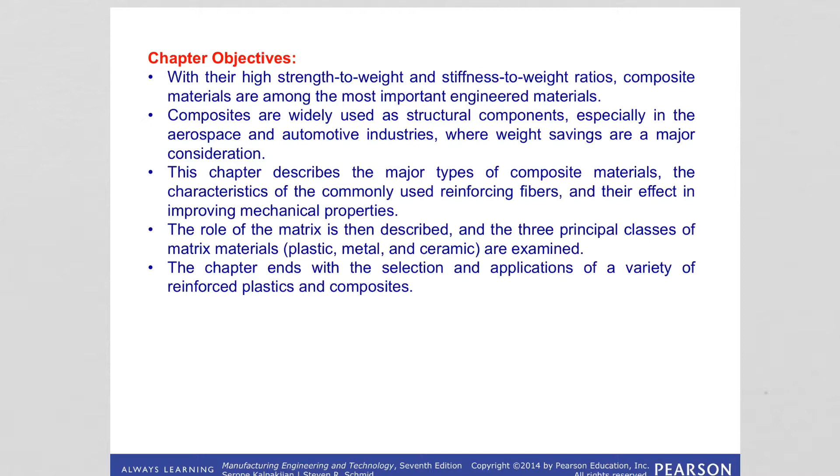So what is actually a composite? It is a combination of two or more distinct and insoluble phases with a recognizable interface. These different parts of the material can be easily determined because they are distinct, chemically different, and there is an obvious interface between the two regions.

The reason why we mix two or more materials is that this way we can obtain properties that are superior to those of the individual components acting independently. So what can be these combinations, how can we combine different types of materials?

We can combine reinforcing fibers with polymer matrix, metal matrix, ceramic matrix, and based on that we divide composites into 3 different types.

Composites are found in applications in aircraft, space vehicles, satellites, offshore structures, piping, electronics, automobiles, boats, and especially sporting goods like tennis rackets, baseball bats, etc.

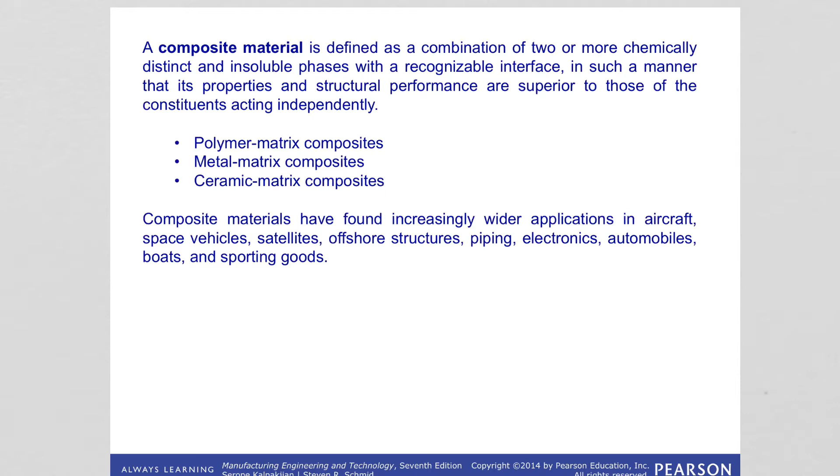Today's aircrafts, in this example we see the Boeing Dreamliner, are 50% composite by weight. Of course, composite cannot be used everywhere because in some areas we need electrical and thermal conductivity, so we use metal alloys like aluminum alloys, but most of it is composite, and this provides lightweight and high strength to weight ratio.

Basically we see carbon laminates and sandwich composites. When we are mixing two or more different materials, we can mix them in a variety of different shapes, so each constituent can have a different shape to optimize the performance.

We also see fiberglass. So as you can see, composite is used in aircrafts.

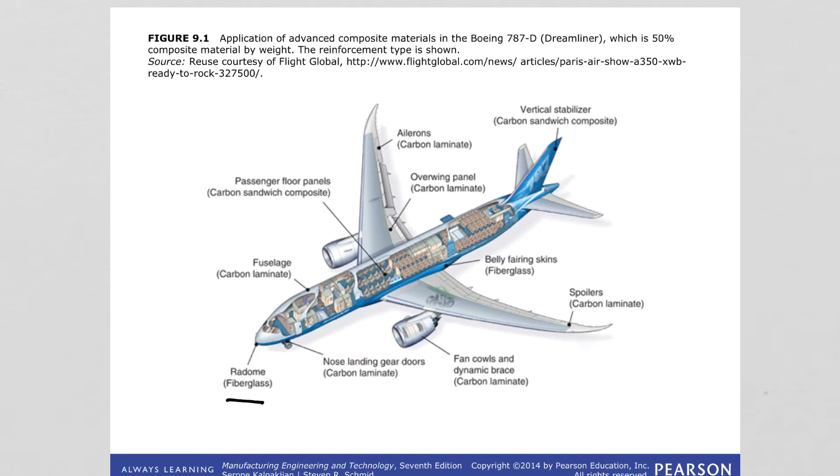So first let's look at reinforced plastics. This is the most commonly used composite, so it is important to cover this topic. We call these reinforced plastics or polymer matrix composites or fiber reinforced plastics.

Basically what we have is a matrix, a continuous phase, and we put fibers in it. These are the reinforcing phase fibers, and this is matrix, and these are fibers. So fibers are discontinuous, dispersed.

It is very important to be able to homogeneously distribute the fibers or other types of reinforcing elements. This way we get a homogeneous distribution of properties, and the polymer can be epoxy or any other type of polymer.

Okay, so we're gonna see those. We know polymers provide lightweight properties, but they are not strong. So by putting in the fibers, we obtain a material that is lightweight, and fibers provide the strength and stiffness. Mixing these two materials gives us high specific strength and high specific stiffness. This also increases the fatigue resistance, toughness, and creep resistance compared to just non-reinforced plastics.

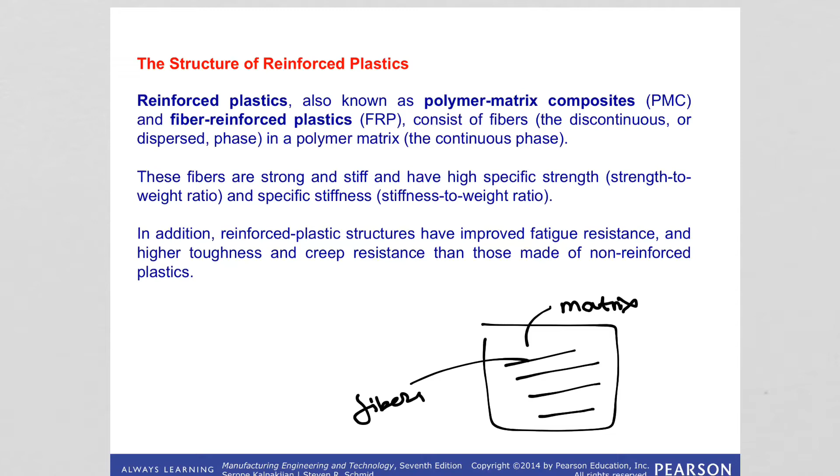So the reinforcing material is usually in the form of fibers, but it doesn't have to be. It can be particles, short fibers, long fibers, flakes. As you can see in these images, we have particles in a composite.

Of course, they are not showing the particles, why I don't understand. But think about it, particles are there, homogeneously distributed in a polymer matrix.

There can be short, chopped fibers, all homogeneously distributed, or there can be long fibers distributed in the structure. These long fibers can also be called continuous fibers, and can be aligned in different angles, like 0 degree, 45 degree, 90 degree, let's say 45 degree.

Depending on how they are aligned in the structure, properties are enhanced only in that direction, not in the transverse direction. These layers can also be put on top of each other, forming laminates, and there are foam structures in between two different materials.

And we can put these in. So as you can see, the configurations of how we mix two different materials are changing.

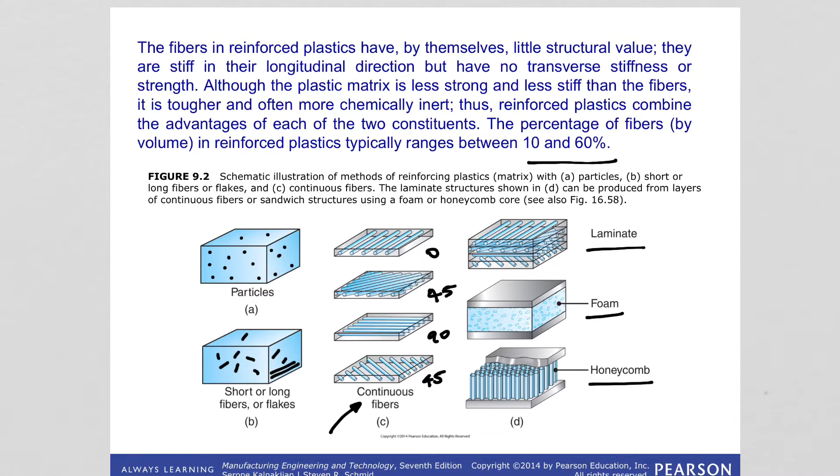So if we look at the reinforcing fibers, what type of fibers are used to reinforce plastics? We can see that glass fibers, carbon fibers, boron fibers, aramids known by its trade name Kevlar, and there are also other fibers important like nylon, silicon carbide, silicon nitride.

As you can see, all these materials we learn can be shaped in the form of fibers and used as reinforcing materials. What about the matrix?

Matrix can be thermosets, thermoplastics, metals and ceramics. For thermosets, this is epoxy and polyester, and thermoplastics there are different types that can be used, and metals like aluminum. The fibers can be aluminum oxide, silicon carbide, and the matrix like magnesium, aluminum, titanium. Ceramics can be silicon carbide, silicon nitride, etc.

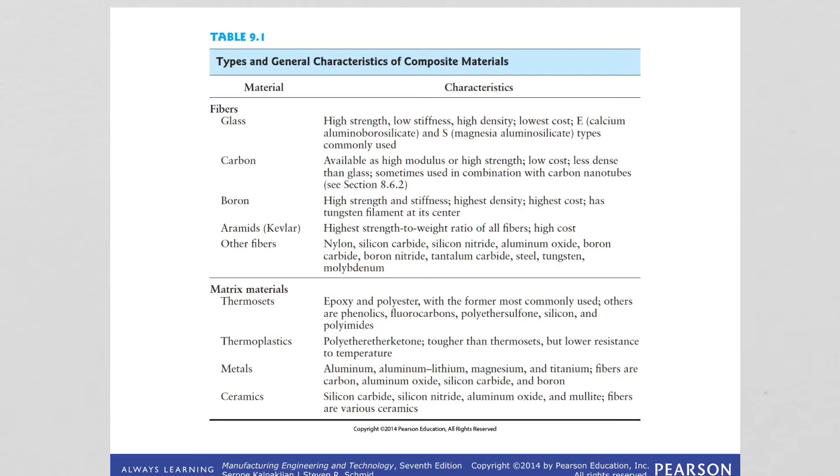In this figure we are seeing specific tensile strength and specific tensile modulus, basically strength over density and modulus over density ratios for various fibers used to reinforce plastics. Some of them are listed with their trade names, and we might not be able to obtain their composition, but we know Kevlar, and you see how high its strength to density ratio is, and different types of reinforcing glasses, graphite, boron, aluminum fibers, titanium, steel. All this information is listed, and we can compare different types of fibers.

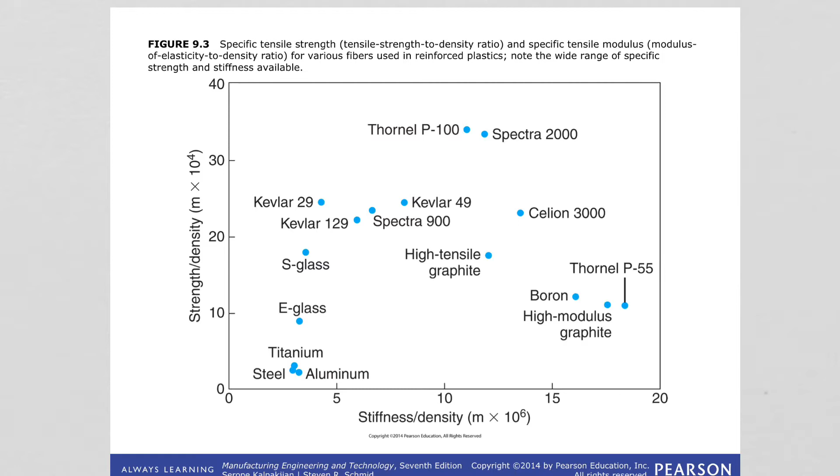So if we look at reinforcing fibers, we have seen glass, carbon, ceramic, aramid or Kevlar, and boron fibers. Now let's look at each of these.

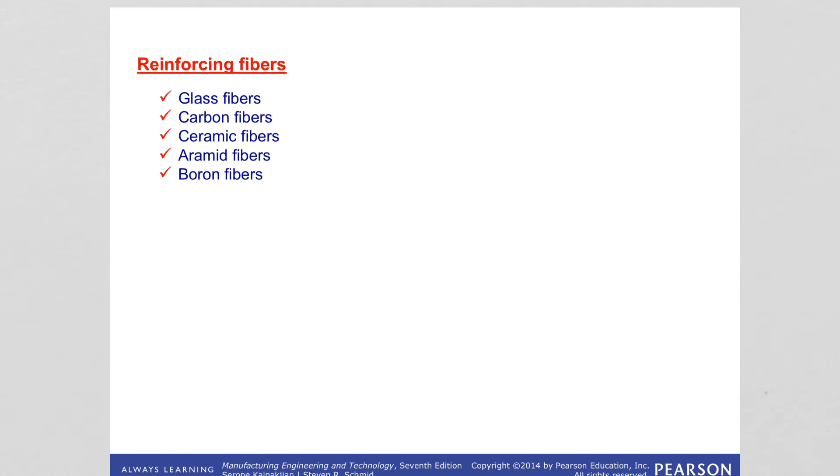Glass fibers are the most widely used ones and the least expensive, that's why it is very commonly used. These composites contain a range of 30 to 60% glass fibers, and the rest is basically polymer. How do they make these glass fibers? They make them by drawing molten glass through small openings in a die. If you watch the video, you will see.

The fibers need to be treated with certain chemicals called silane, which is a silicon hydride. The reason they treat the fibers with that is because this way they can provide better interaction between the fibers and the matrix, because if fibers and matrix don't interact nicely, the stress transfer from the matrix to the fiber doesn't happen. The interface is very important between the fibers and the matrix, because when we apply stress to the matrix, it has to transfer the stress to the fibers, since fibers are the ones carrying all the stress. We want the fibers to carry the stress, not the matrix. That's the whole idea.

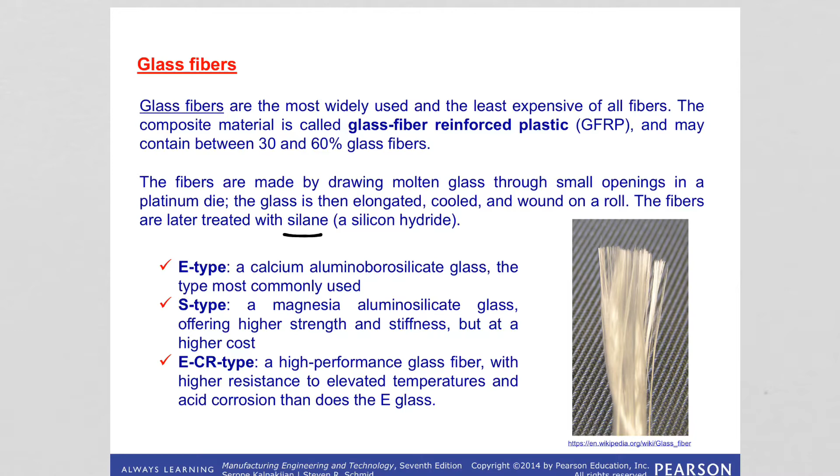So there are different types of glass fibers: E-type, which is a calcium aluminoborosilicate glass; S-type, a magnesia aluminosilicate glass; ECR type, which is a high performance glass fiber with higher resistance to elevated temperatures and acid corrosion than E-glass. Depending on the application, you can choose one of these different glass fibers. Basically what changes is the composition.

Carbon fibers are more expensive than glass fibers, but they provide great properties like low density, high strength, high stiffness. So how do we make carbon fibers?

First you need a carbon source, which comes from organic molecules like polyacrylonitrile, PAN. The PAN fibers are exposed to high temperatures in an oxygen-free environment, and all non-carbon atoms are expelled from the structure. Once this is achieved, the fibers are woven into a fabric or combined with other materials that can be molded into desired shapes and sizes. There are also graphite fibers which are conductive and make it possible to enhance the electrical and thermal conductivity of the matrix, the plastic.

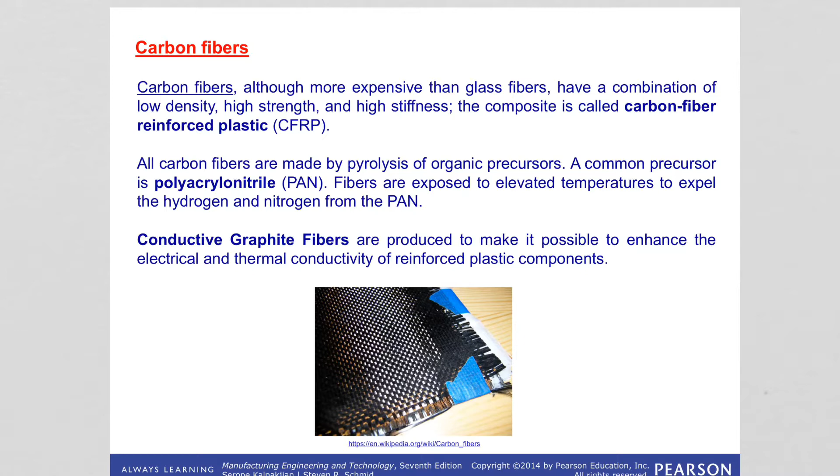That can be used in electromagnetic radio frequency shielding, lightning strike protection. So this one also has different areas.

Ceramic fibers: of course, ceramics can be suitable for high temperature applications, and ceramic fibers are usually put into a metal matrix. We have difficulty processing them, so they can be more like chopped fibers or particles. These fibers have low elongation, which we expect, right? They are not ductile, have low thermal conductivity, good chemical resistance, in addition to being suitable for high temperature applications. There is alumina, silica, boric oxide, and different types of ceramic fibers like silicon carbide are possible.

What about polymer fibers? We can make fibers out of polymers, like nylon, aramid, and different types. The most common one you may have heard of is Kevlar. This is the toughest, because remember how polymers are made: there is strong covalent bond in the chain, but between the chains there are weak forces. But when it comes to Kevlar, those are not weak bonds between the chains, but stronger hydrogen bonds and other covalent bonds, which make them very strong.

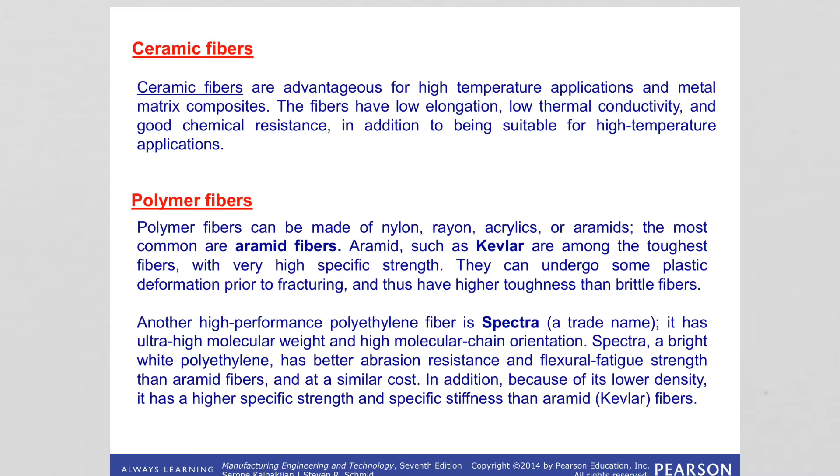Next is boron fibers. These are basically just fibers of tungsten with a layer of boron deposited on top using different techniques. One of them is CVD, chemical vapor deposition. In a certain atmospheric environment at high temperatures, boron is deposited on the surface of the tungsten filament. These provide high strength, stiffness, and resistance to high temperatures, but tungsten is heavy. That's why boron fibers are heavy, and also boron is expensive.

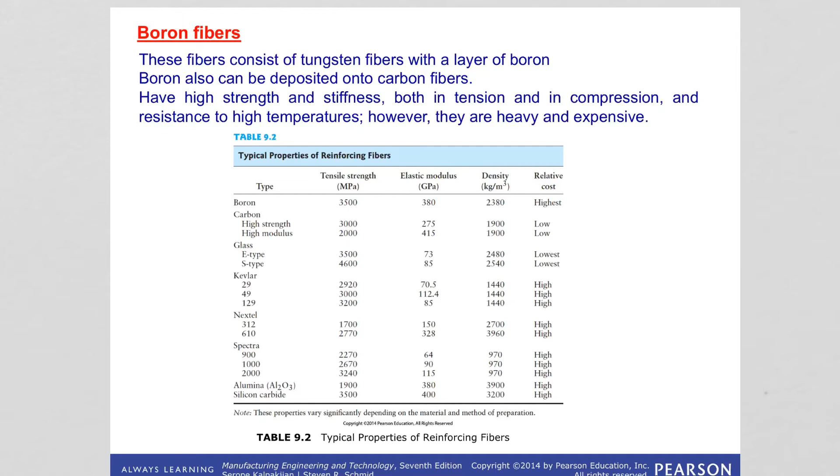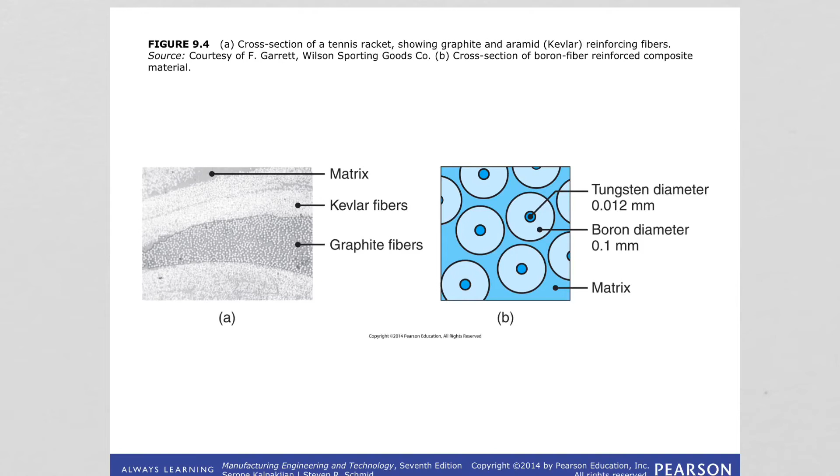This is showing us a cross section of a tennis racket. As I told you guys, in sporting goods, composites are commonly used. When they look under the microscope, you can see the layers, different layers of reinforcing materials and the matrix. You don't have to just put Kevlar in a matrix, you can put two different fibers in a matrix. We are seeing graphite together with Kevlar combined with probably a polymer matrix, providing lightweight and strength together. We also see the structure of boron fiber reinforced composite: we see the matrix, the tungsten core, the fiber, and the deposited boron on top of it.

The fiber size and length is very important in how much enhancement you can get out of that material. So they can be short and long. Short ones are discontinuous, long ones are continuous. So how do we define short fiber and long fiber? If the mechanical properties improve as a result of increasing the fiber length, it is called short fiber. That means as you keep increasing, you keep getting better and better results - that means you have a short fiber. If you keep elongating the fiber and still aren't getting improvement, that means you already have a long fiber. After a certain length, we don't get an increase in improvement as we increase the fiber length - that's what we call the long fiber.

Fibers can be in different configurations and morphologies, like chopped, particles, flakes, a continuous roving like twisted strands, woven fabric, yarn, twisted strands, and mats of various combinations.

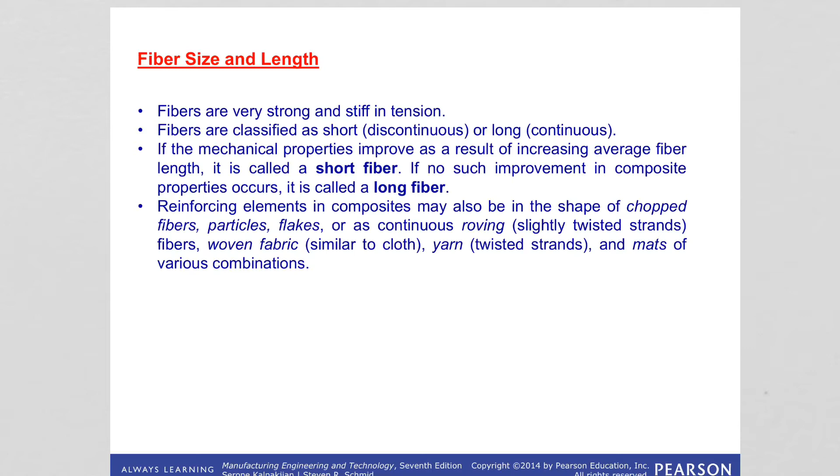What about the matrix? As we said, it can be ceramic, polymer, or metal. What is the role of the matrix? It's basically to hold the fibers in place and make sure to transfer the applied stress to the fibers, so the fibers can carry the load. That is the whole goal. You want the fibers to handle the stresses, not the matrix.

It also protects the fibers against damage and environmentally caused chemical degradation. Because of the ductility and toughness of the plastic matrix, it also provides slow propagation of cracks, preventing sudden failure of the material.

We said a matrix can be thermoplastic or thermoset, and the most common are epoxies, nearly 80% of all reinforced plastics. There are also polyesters, which are less expensive than epoxies. But many other polymers can be used as matrix, depending on the application. Remember, thermosets have better strength values compared to thermoplastics.

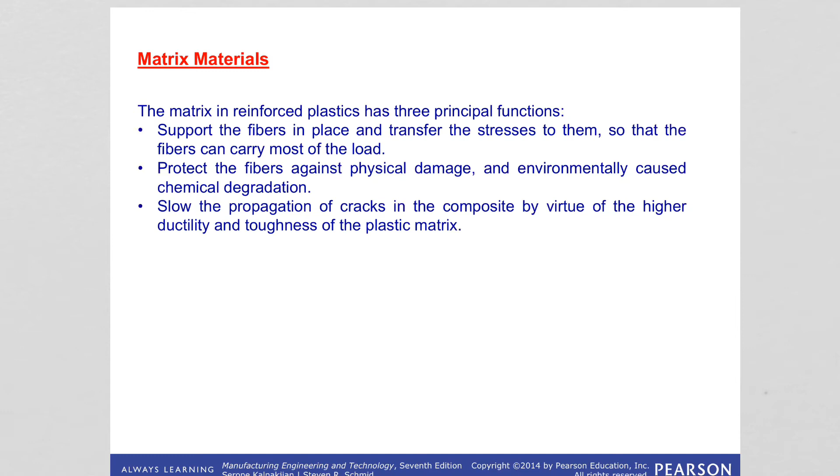Mechanical and physical properties of reinforced polymers depend strongly on what type of fibers you have, the shape and orientation of the reinforcing fibers, their length, and how much of them is inside the material, their volume fraction. All of this determines the behavior and properties of the overall composite.

As I told you, the interaction, the interfacial bond strength between the fiber and the matrix, is very important, because if there is weak bonding, you cannot transfer the stress properly to the fibers, and what happens is fiber pull out or delamination of the composite. So we talked about glass fibers being treated with silane in order to enhance this interfacial bond.

The properties of composites are highly anisotropic, meaning you achieve strength and stiffness enhancement only in a certain direction, the direction the fibers are aligned.

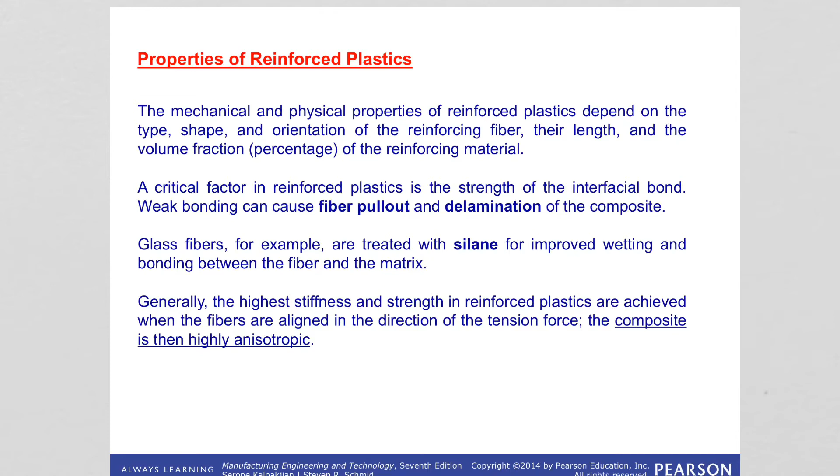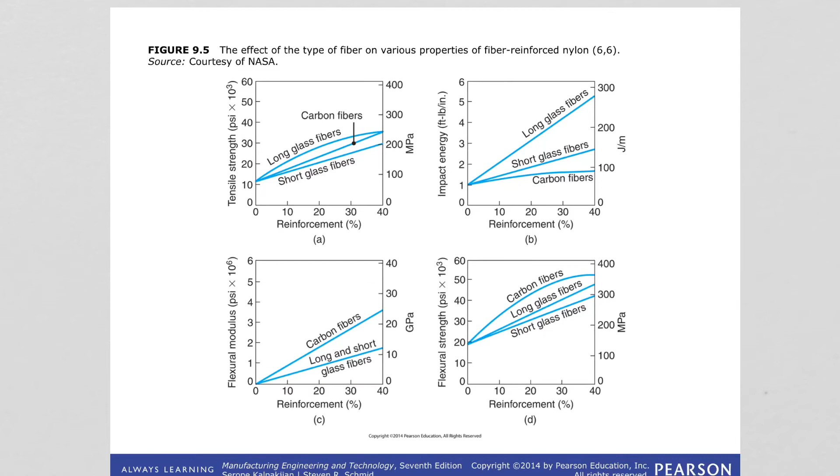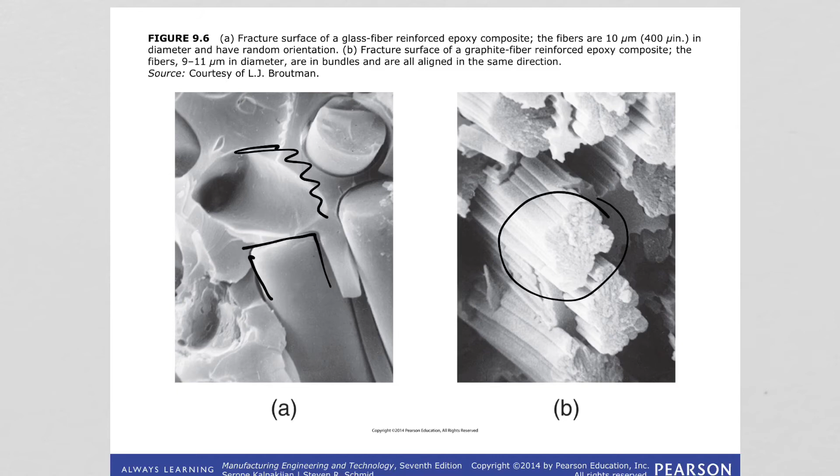We also see the fracture surface of graphite fiber reinforced epoxy composite. In this case, the fibers are in bundles, not individually dispersed. These bundles are all aligned in the same direction in the structure, and they are between 9 to 11 micrometers in diameter.

As I told you, the property enhancements are achieved in the direction of alignment of the fibers. All types of properties—creep resistance, thermal and electrical conductivity, thermal expansion—are anisotropic, not just tensile strength. In the transverse direction, though, we don't obtain the same enhancement.

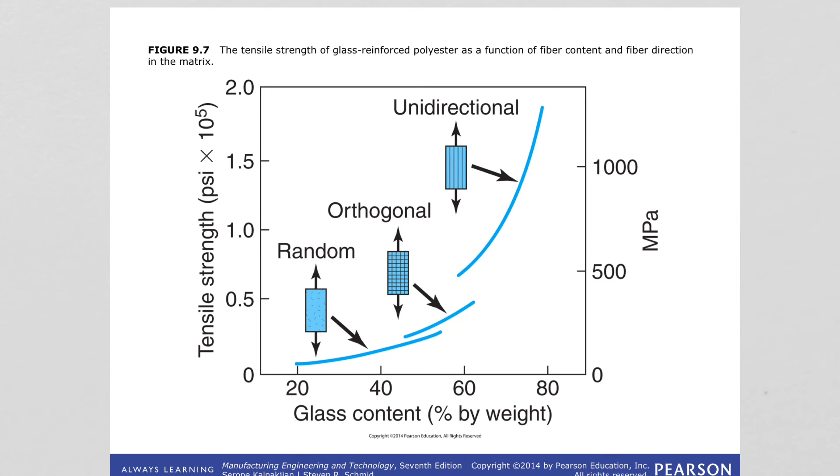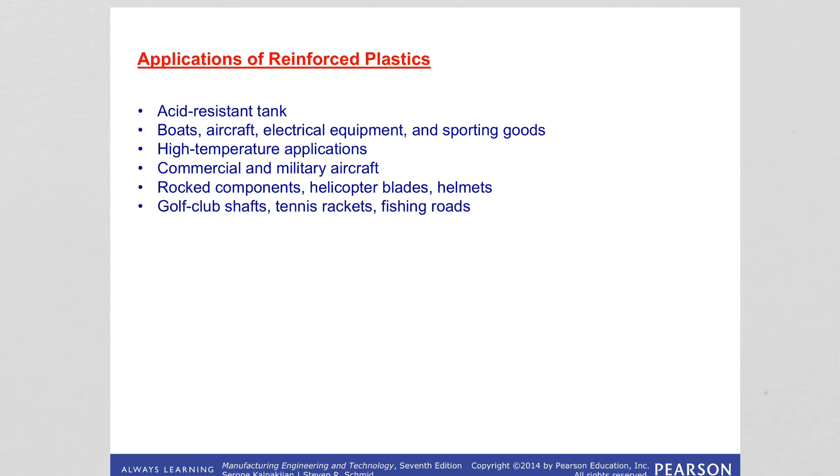So what are the application areas of reinforced plastics? A wide range: acid resistant tanks, boats, aircraft, electrical equipment, sporting goods, high temperature applications, commercial and military aircraft and rocket components, helicopter blades, helmets, golf club shafts, tennis rackets, fishing rods. Just some of the examples—there is a wide range of application areas for composites.

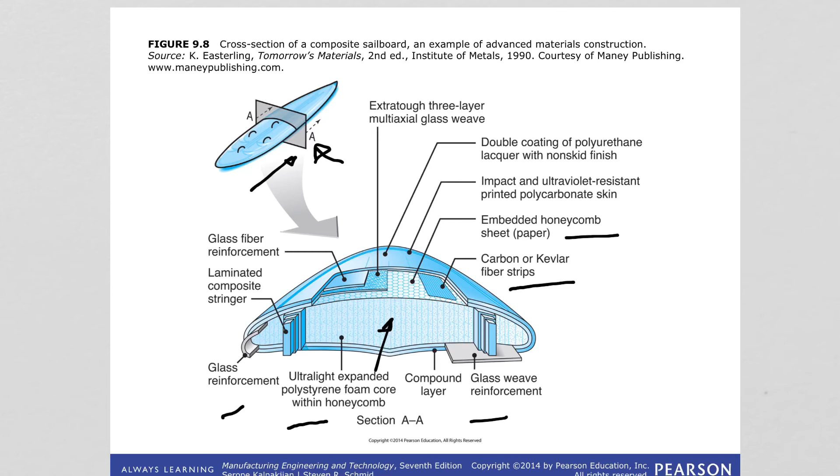Kevlar is used in body armor. Inside the body armor there are Kevlar fibers that are woven, sandwiched with plastic films that provide excellent protection.

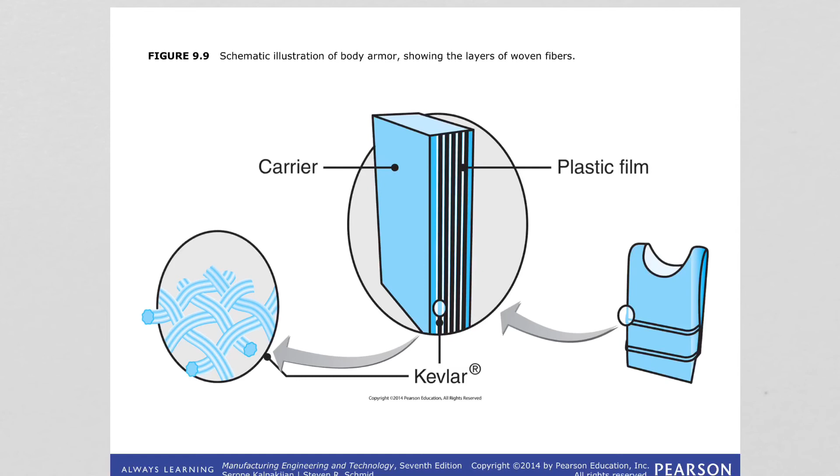So what are metal matrix composites? As the name implies, you have metals as the matrix. This can be aluminum, aluminum-lithium alloy, magnesium, copper, titanium, and other super alloys. The reinforcing fibers are basically graphite, aluminum oxide, silicon carbide, boron, and molybdenum and tungsten can be the fibers.

Compared to polymer matrix, the advantages are higher modulus, toughness, ductility, and higher resistance to elevated temperatures. But metals are heavier compared to polymers, and it's also difficult to manufacture composites with a metal matrix structure.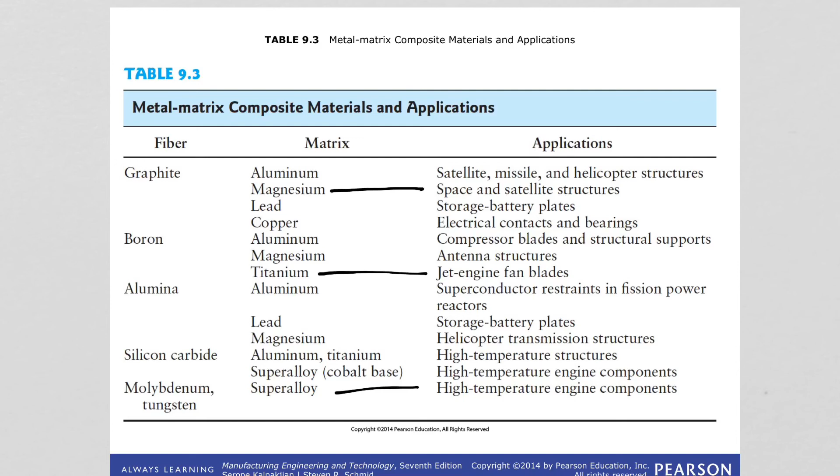We are seeing different applications like graphite reinforced magnesium for space and satellite structures, and super alloy as matrix reinforced with silicon carbide or molybdenum tungsten for high temperature engine components. Depending on the application, it determines what type of properties we want, and by combining these matrix and fibers, we can obtain those properties.

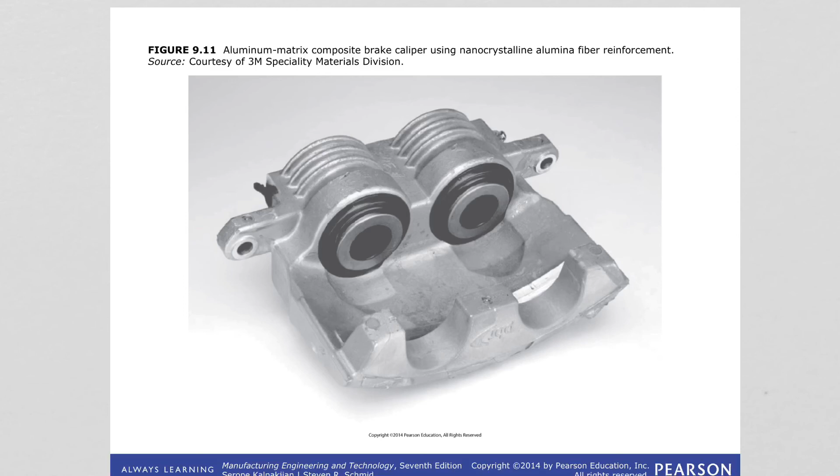In this image, we are seeing an aluminum matrix composite brake caliper. This one is made using nanocrystalline alumina fiber as the reinforcement in aluminum matrix. This provides lightweight and weight savings when used in vehicles, because traditionally these brake calipers are made out of cast iron, which is heavier.

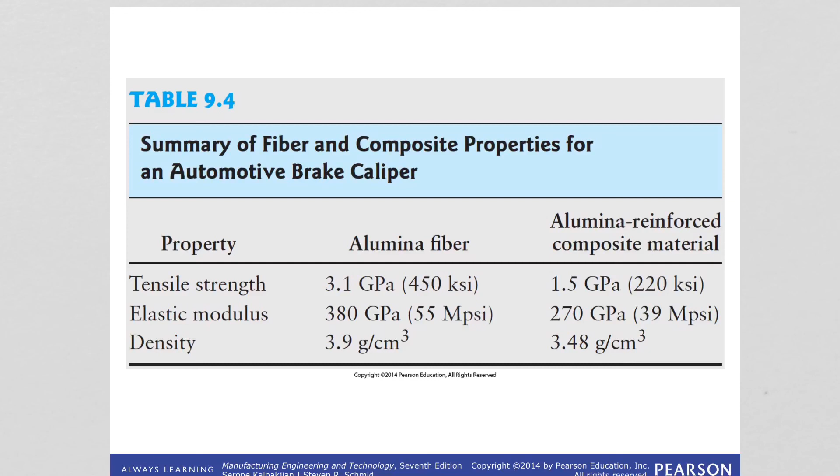Ceramic matrix composite, as the name implies, has a ceramic matrix, which provides resistance to high temperatures and corrosive environments, but lacks toughness and is brittle. The matrix can be silicon carbide, nitride, aluminum oxide, and carbon. These composites are famous for their ability to retain strength up to very high temperatures, like 2500 degrees C. Fibers can be carbon and aluminum oxide, used in jet and automotive engine parts, deep sea mining equipment, pressure vessels, structural components, cutting tools and dies.

Watch the videos I showed you in the canvas. Those show how F1 cars are made out of carbon matrix composites to achieve lightweight.

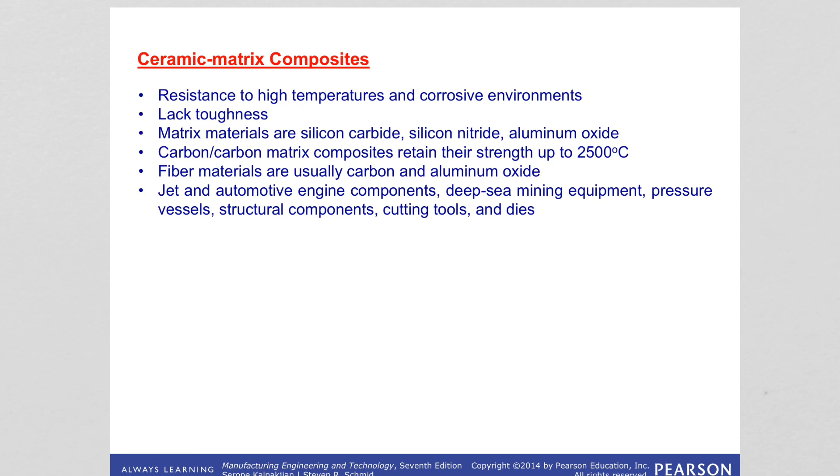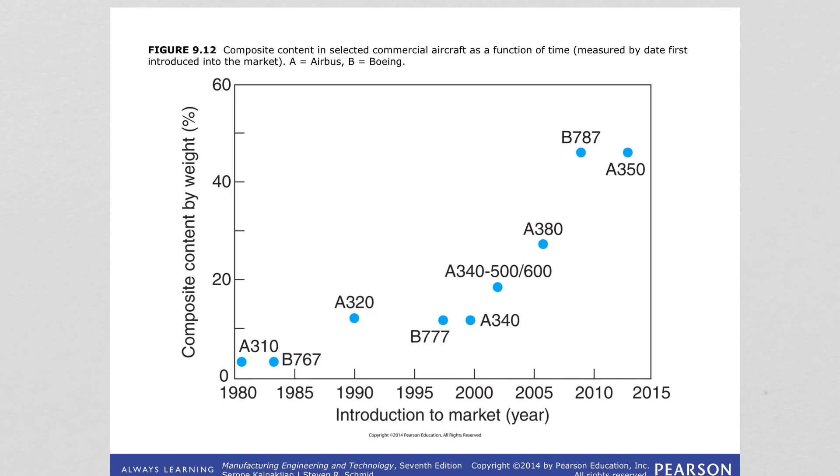In summary, composites are an important class of engineering materials. We can have plastic, metal and ceramic as the matrix, which are used mainly in aircraft, aerospace and transportation industries, sporting goods and structural components. Fibers can be glass, graphite, aramid, boron, and these polymer matrix composites can have high strength to weight ratios and high stiffness to weight ratios.

In metal matrix composites, the fibers can be graphite, boron, aluminum oxide, silicon carbide, molybdenum, tungsten, and the matrix can be aluminum alloys, magnesium, copper, titanium, and superalloys. In ceramic matrix composites, the fibers are carbon and aluminum oxide, and the matrix usually is silicon carbide, nitride, aluminum oxide, and carbon. It's very important to understand how we put these materials together, in what shape, what structure, and what are the reinforcement fiber size, length, volume percentages, and the strength of the bonding between the interface of fiber and matrix.